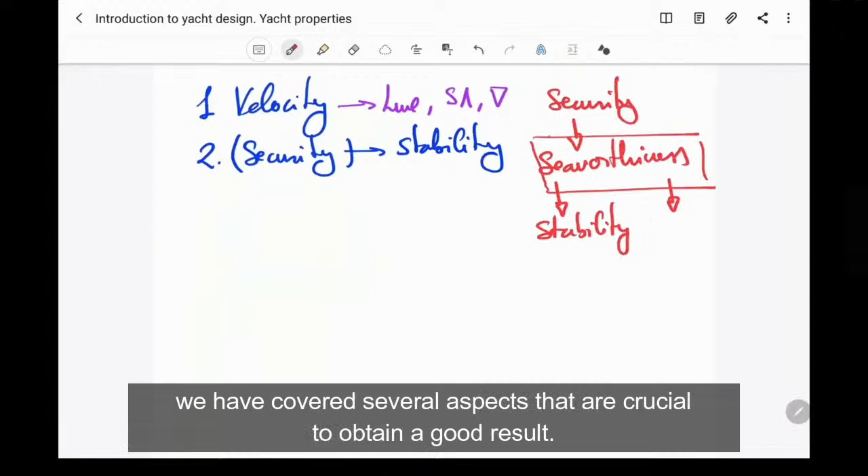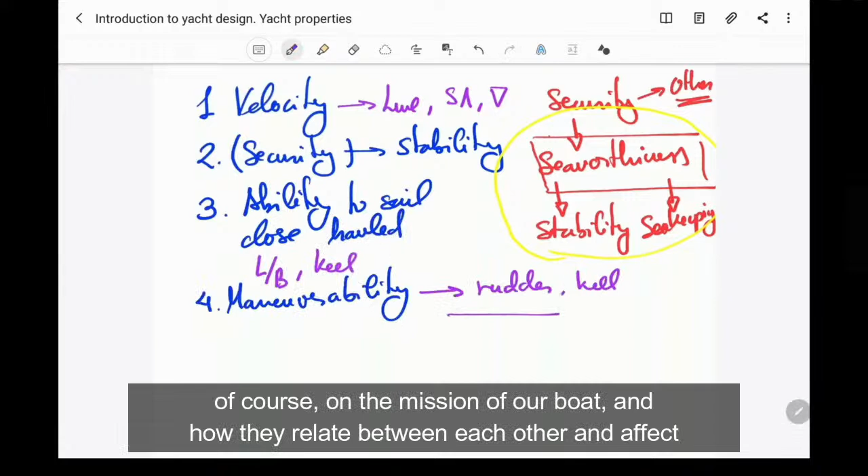Along this journey that we have done together towards the design of our target sailing yacht, we have covered several aspects that are crucial to obtain a good result. We started discussing the most important qualities to be achieved by our hull. These depend on the mission of our boat, and how they relate to each other affects the elements of the yacht—hull, sails and rig, and appendages—which will have a direct impact on our final result.

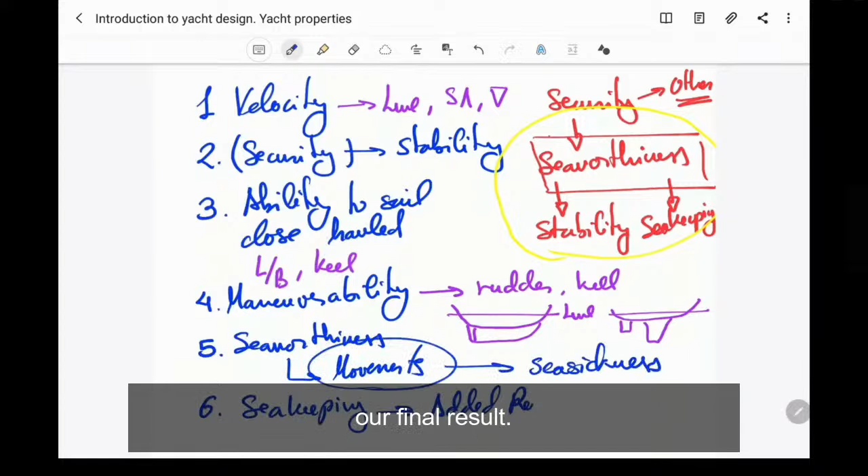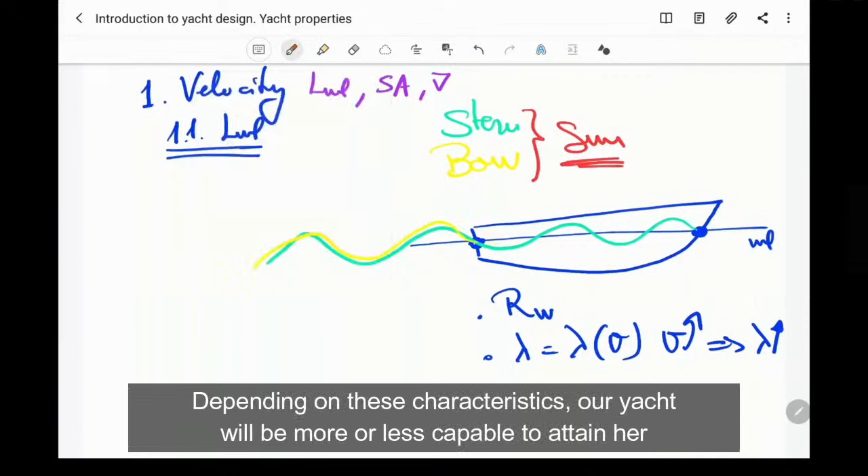Among the qualities of the sailing yacht, the first characteristics that we assessed were those linked to velocity. Depending on these characteristics, our yacht will be more or less capable to attain her hull speed easily and to attain the maximum speed possible with the wind available.

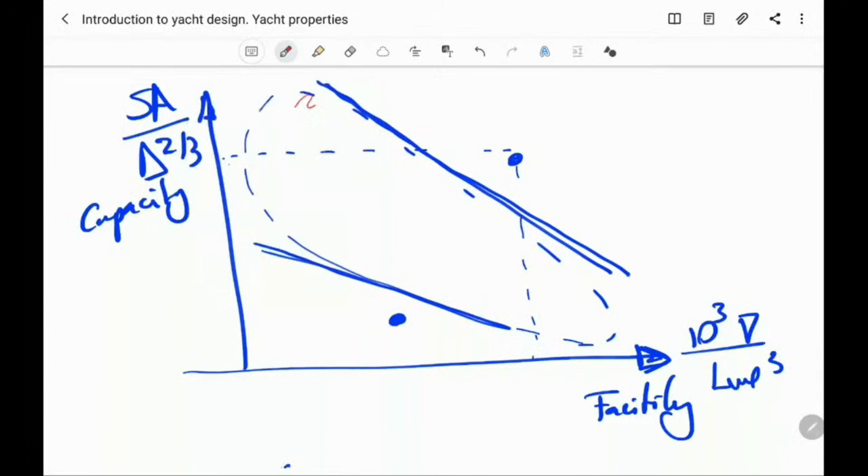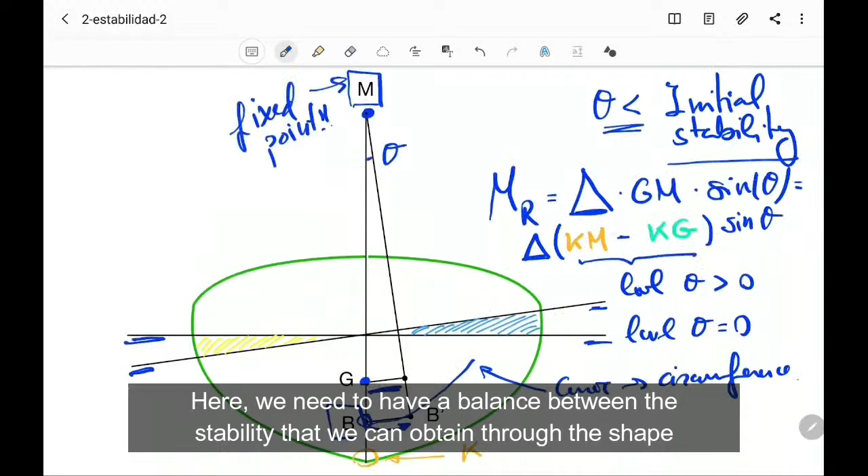Then we move to the aspects linked to security, and hence static stability. Here we need to have a balance between the stability that we can obtain through the shape of the vessel and that given by how we locate the weights. The relation between these two will give us different characteristics for our GZ curve.

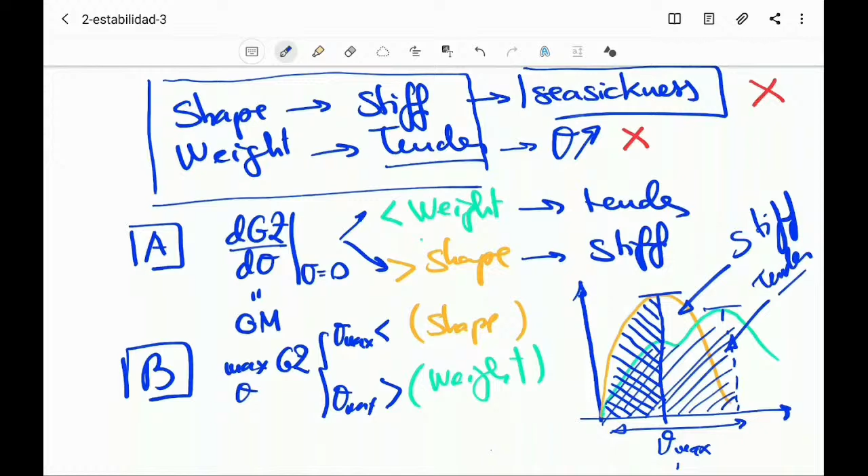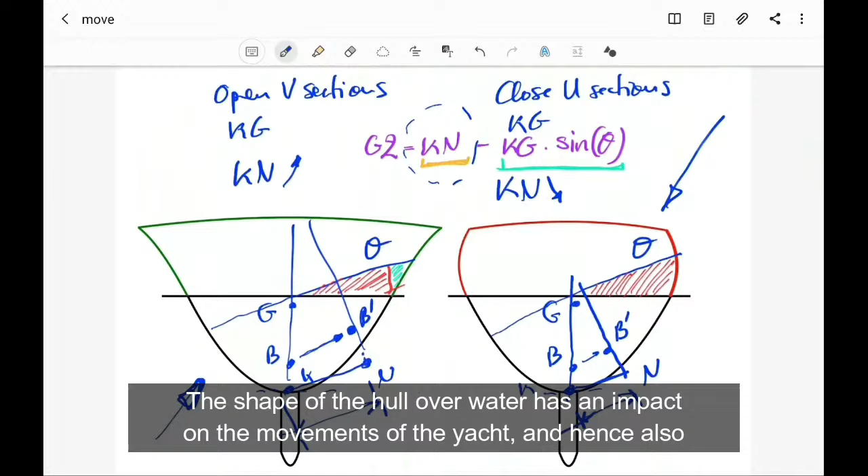Additionally, dynamics also play a role in the behavior of our yacht. The shape of the hull over water has an impact on the movements of the yacht and hence also on stability. Furthermore, better movements will imply less added resistance in waves, a quality that is desirable to minimize.

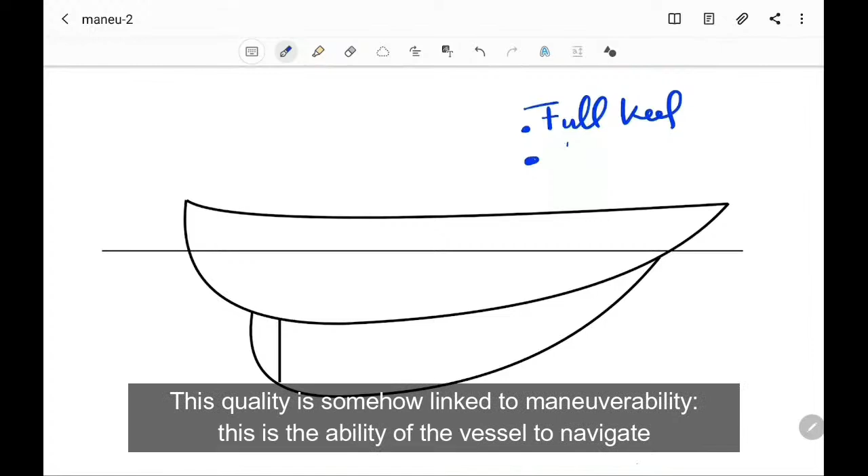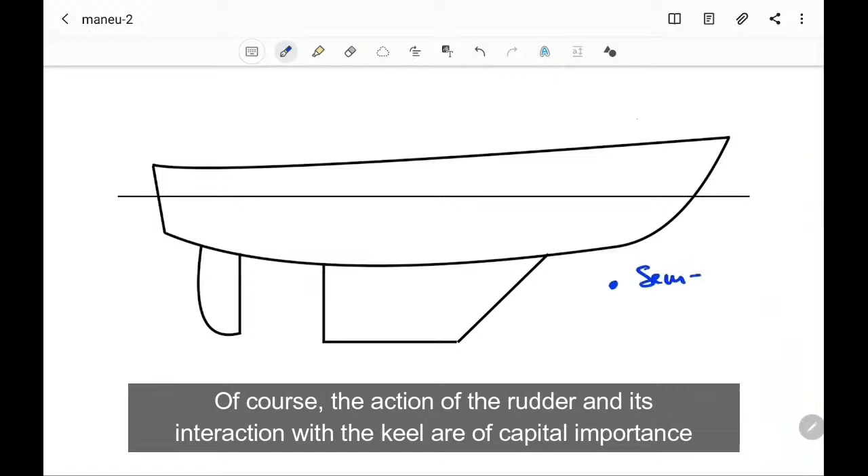It is also important for our vessel to have the capacity to sail close haul. This ability will depend mainly on the relation between the sails and the keel. This quality is somehow linked to maneuverability—the ability of the vessel to navigate and change her course with minimum action of the rudder. Of course, the action of the rudder and its interaction with the keel are of capital importance regarding both maneuverability and the ability to sail close haul.

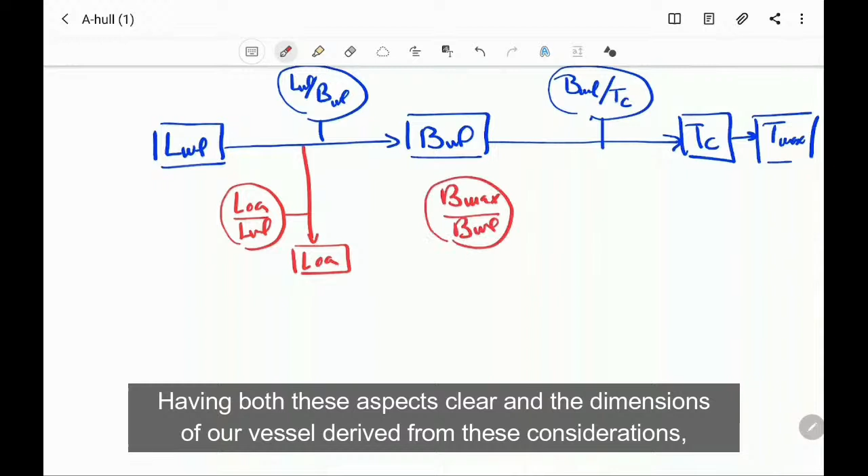Having both these aspects clear, and the dimensions of our vessel derived from these considerations, one can start modeling his own sailing yacht. In this course, we have shown you how to build your own design from scratch, playing around with control points to obtain the desired lines plan.

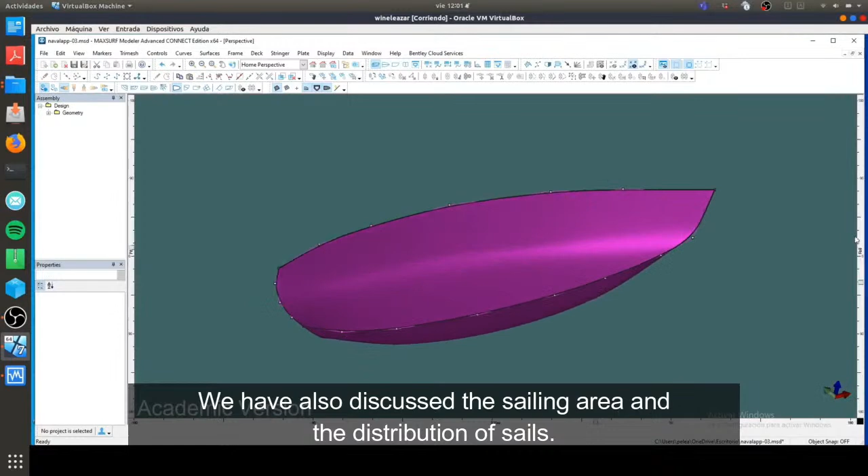We have also discussed the sailing area and the distribution of sails. We have also discussed typical rudder and keel configurations and the profiles that are normally used for these appendages.

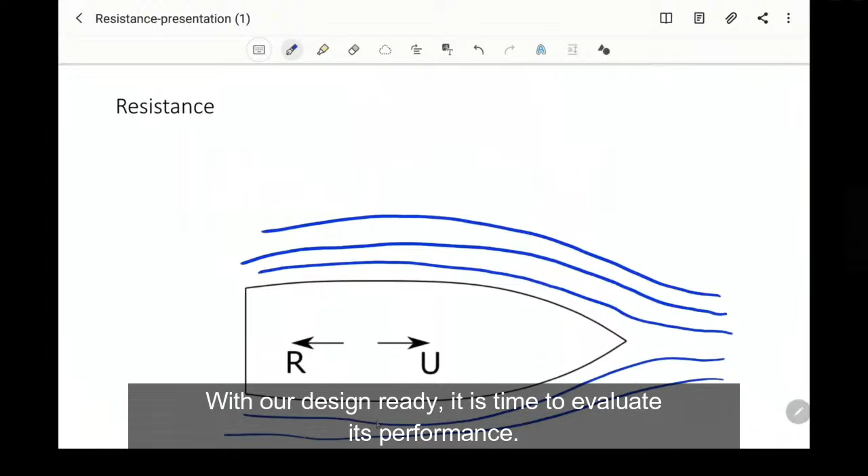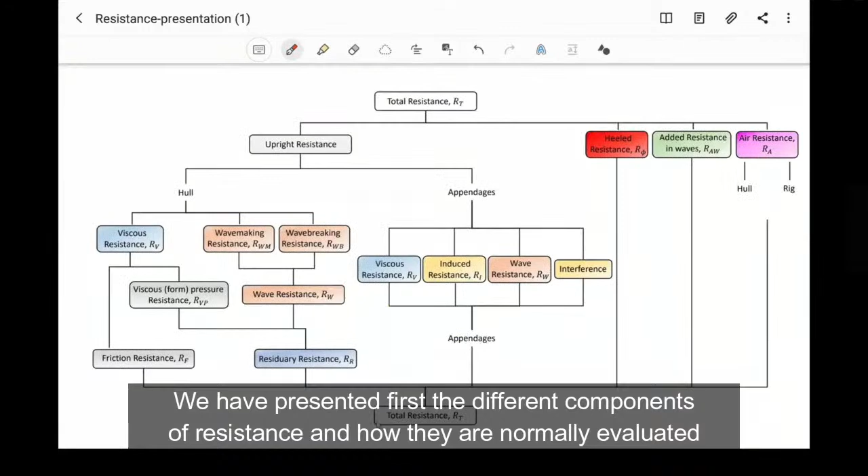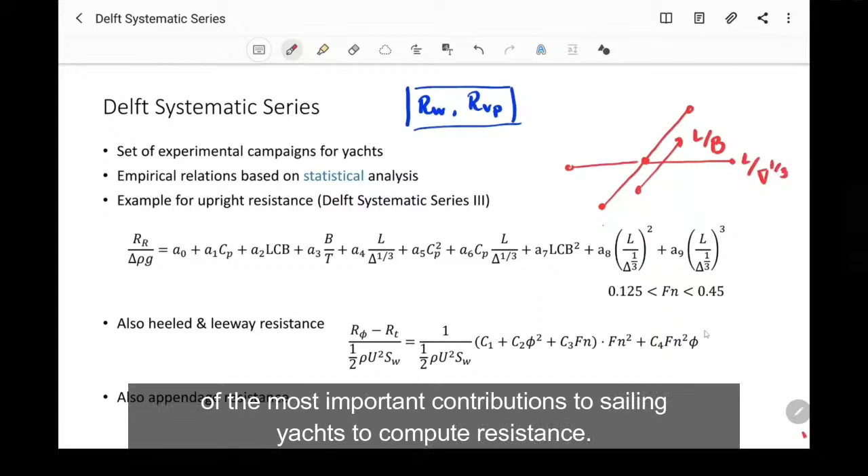With our design ready, it is time to evaluate its performance. For that, we have introduced the concept of naval architecture software. We have presented first the different components of resistance and how they are normally evaluated in the literature. We have shown an example of resistance calculation done with the Delft systematic series, one of the most important contributions to sailing yacht resistance computation.

From the results obtained, one can decide if the design complies with the desired characteristics, or which changes could be made to the hull instead.

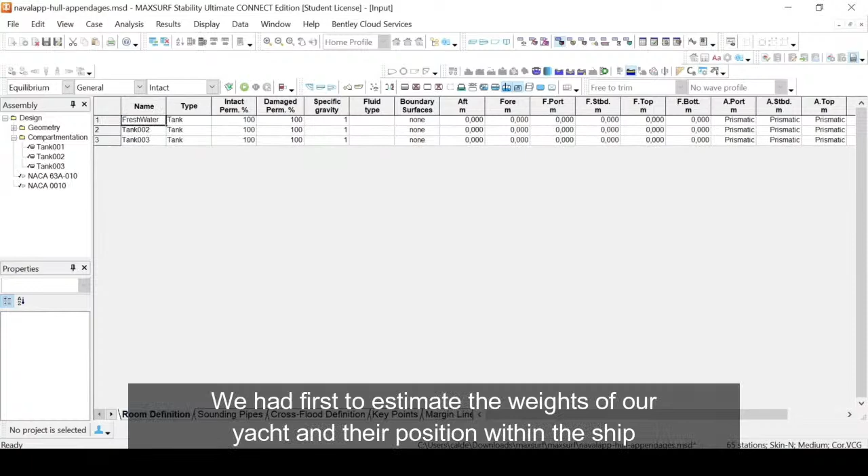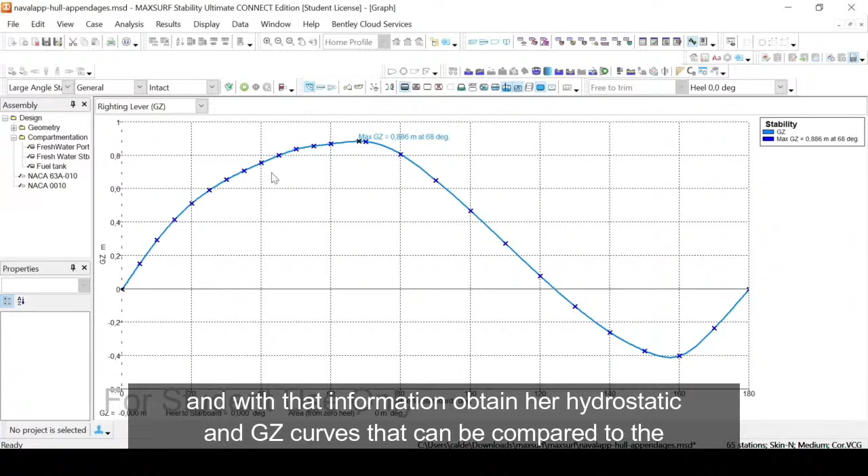In the same line, we have evaluated the stability of our design. We had first to estimate the weights of our yacht and their position within the ship, and with that information, obtain her hydrostatic and GZ curves that can be compared to the expected trends that we estimated at the initial stages.

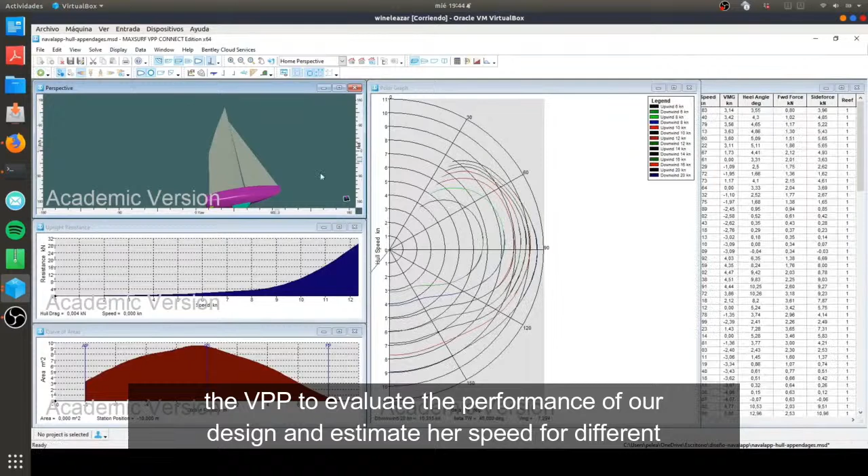Finally, we can estimate the sail forces and include all this information together in the VPP to evaluate the performance of our design and estimate her speed for different winds and directions.

This would be the end of the first look of the design process. From this point, as designers, we would have to evaluate the good and bad capabilities and vary the different elements accordingly, in order to obtain, in the end, a satisfactory result.

So this is the end of the course. We hope that you have enjoyed the journey, learned many things, and especially that the course has met your expectations. We will be very glad to meet you in future adventures, and please do not hesitate to contact us in case you need any further help.